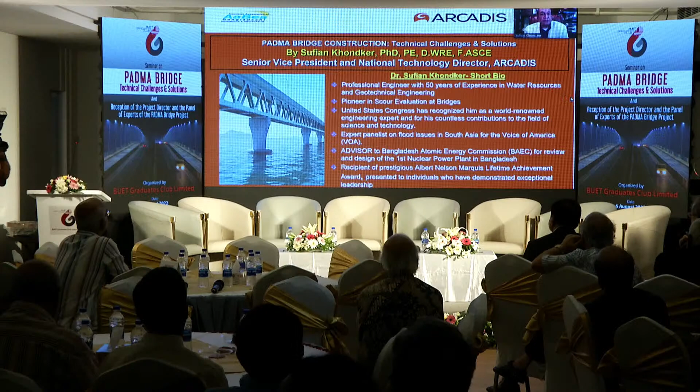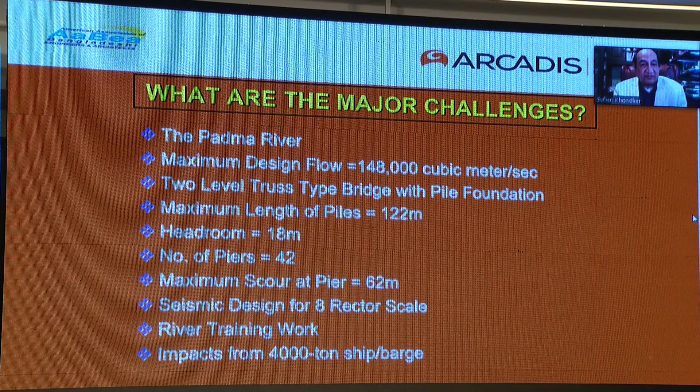What are the major challenges faced by the Padma Bridge? First and foremost, of course, the Padma River, with tremendous flow, over 150,000 cubic meters per second. The bridge itself is a two-level truss-type bridge with pile foundation, which is something unusual. We'll talk about that quite a bit. Another major challenge was the pier scour, seismic design, and of course the river training work. It was also designed for an impact of a 4,000-ton ship or barge.

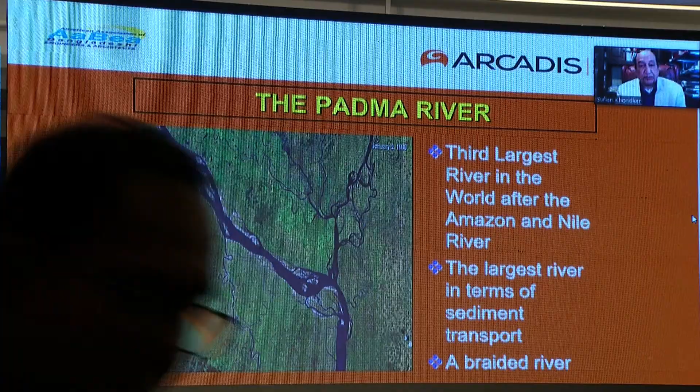To start with the river, the Padma River at the site of the bridge, as all of you know, is the third largest river in the world after the Amazon and the Nile in terms of flow. But Padma is the largest in terms of sediment transport in the world. The Padma River is defined as a braided river.

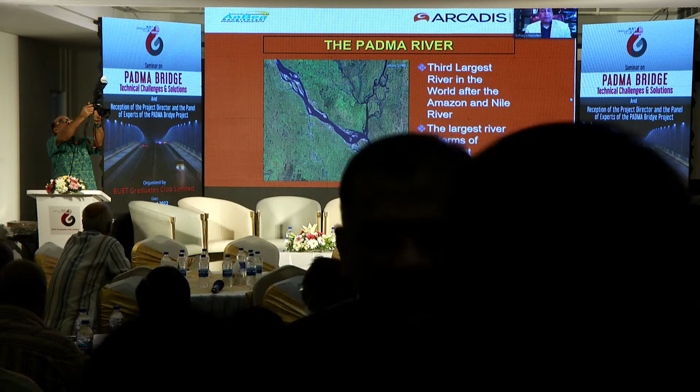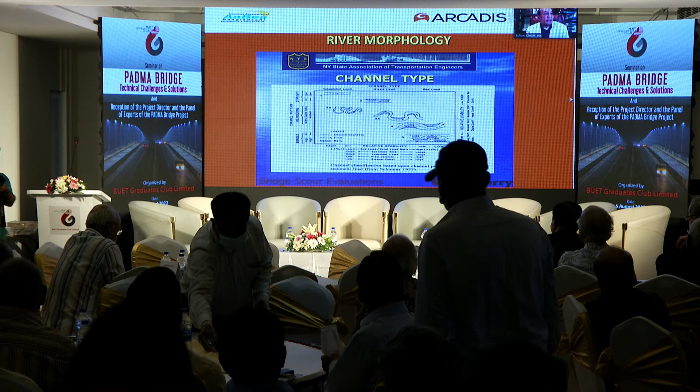What is a braided river? We river engineers grossly divide all the rivers in the world into three categories. On the left-hand side, it is shown as a straight river. These are very rare, only in the mountain region. During the inception of the river, these are narrow and kind of straight. Then when it enters the floodplain, it has a wide width.

It can wind around, which we call the meandering river. Most of the rivers in the world are meandering rivers. The third category of the river is the braided river.

The meandering river, as you can see, follows certain laws of nature. It has a well-defined bend and follows certain criteria, with amplitude as well as wavelength. We also know in a meandering river, the outer bend, the outside of the bend, always has scour, while the inside of the bend is always deposition. And also the bend moves downstream at a certain rate. Knowing all those criteria that every meandering river follows, it is much easier for a river engineer to design a river training work or bank protection work. These are predictable.

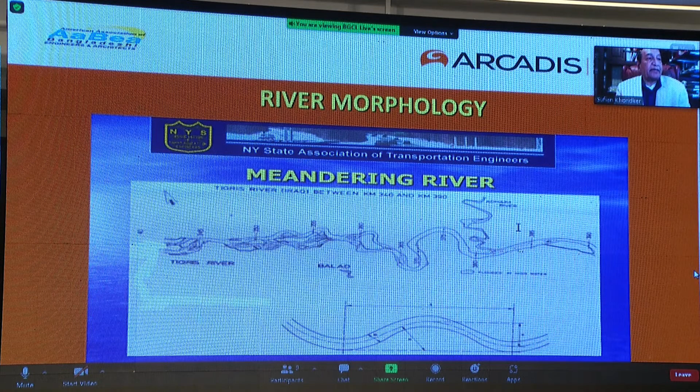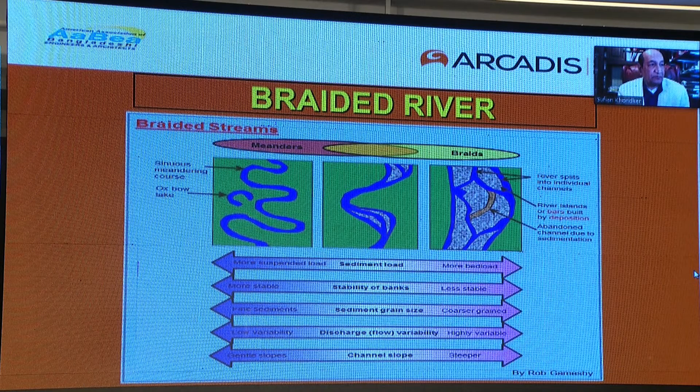The third category of the river is shown on the right-hand side. These are the braided rivers. They have no definite channel; the channel shifts from one bank to the other in a short time. In addition, the braided rivers carry a tremendous volume of sediment, and sandbars can develop anywhere.

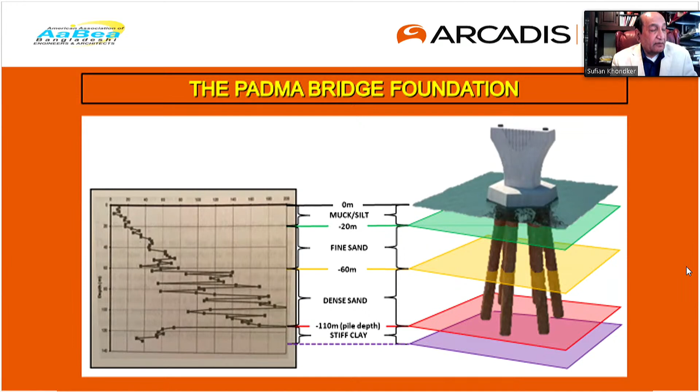This is the drawing developed by the contractor showing the 6 battered piles with a pile cap. The piles are battered because this helps take the lateral load generated from a seismic event, which is very beneficial. That's why all the piles, 1 to 6, are battered.

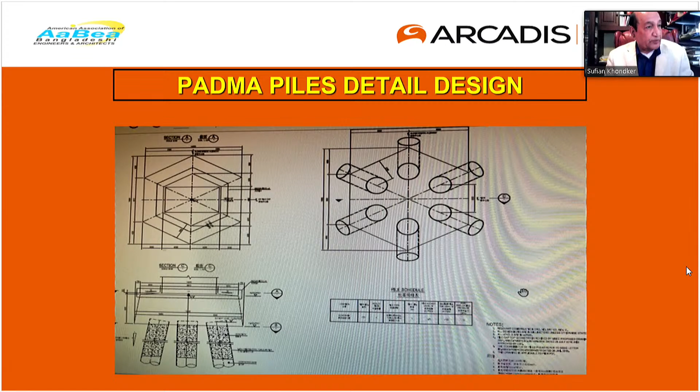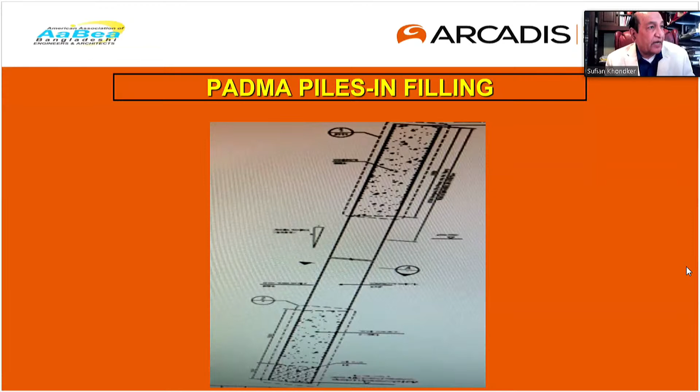The piles are tubular steel structures of very large diameter. The top 15 meters was reinforced concrete, while the majority of the length was infilled with compacted sand. At the lower end was tremie concrete and a plug so that soil cannot enter the tubular structure. That is the infilling for the piles.

This concept of tubular steel piles was first introduced in Bangladesh for the Jamuna Bridge by a great engineer, Ben Gerwick Jr., one of the greatest engineers from the United States. I was fortunate to work with him - he was a consultant for one of my most difficult projects, the submerged intake structure for the St. Lucie nuclear power plant.

As you can see, when they investigated all the piers, the soil of course varies quite a bit. On 22 piers, it was found that the soil may not have adequate capacity to carry the load coming from the piers, roughly about 10,000 tons. So...

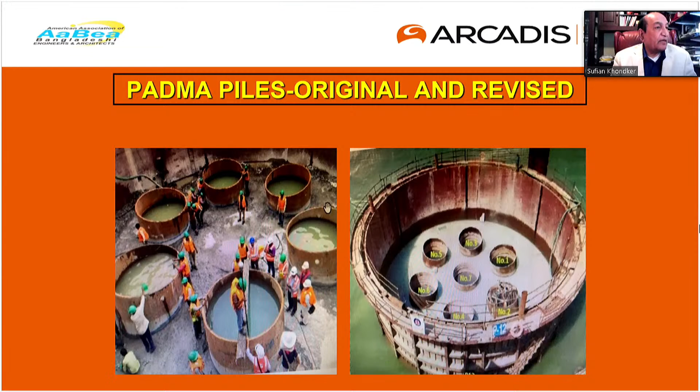So for the remaining pile structure, an innovative design was done to improve the surrounding soil by skin grouting.

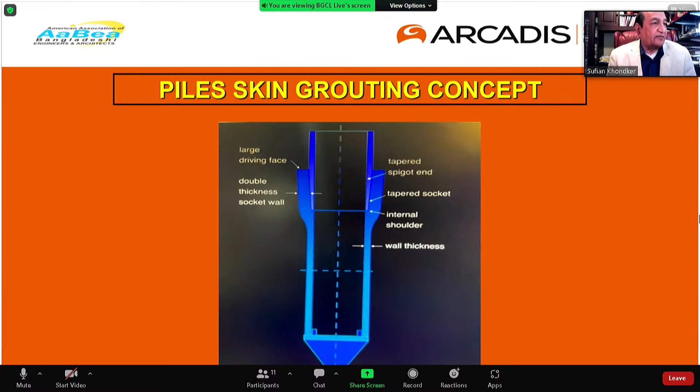But in Padma Bridge, the piles were already fabricated - those are 3-meter tubes or steel pipes, so it was a little difficult to implement this standard concept. The idea, as our respected JRC sir told us, was that channels are welded to the piles outside, and all the channels had perforations. Then grout was pumped into those annular spaces, coming out through the pores and openings to fill the pores of the sand and increase the friction.

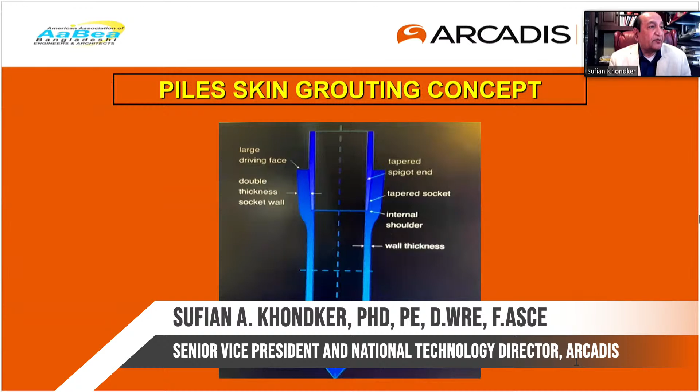But in Padma, the problem was that the sand was very fine, and obviously the pores were so small that conventional grout would not be able to enter those pore spaces. So a special fine cement was imported from Australia and used for pumping grout and introducing it into the soil to increase capacity. And that worked - two load tests were done, showing substantial improvement in the skin friction.

The driving of this kind of pile is also unheard of. This 3-meter diameter pile going a length between 98 to 122 meters is unbelievable. The two hammers used in the Jamuna bridge, with a maximum length of 80 meters, were also used. Then a specially designed hammer was fabricated in Germany by the Menck company that was used to drive the piles to the design depth. It was unheard of. This is never done anywhere in the world.

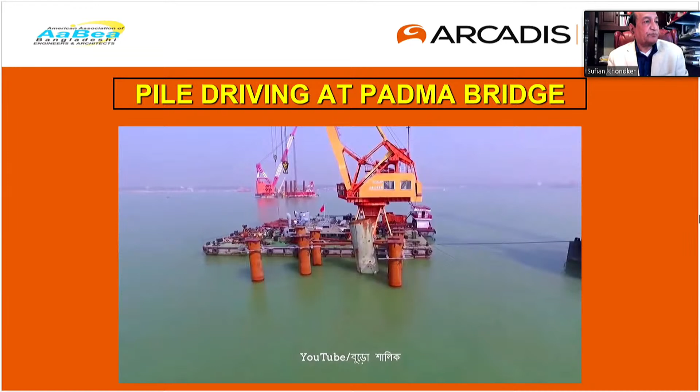Another problem was the scour. Scour evaluation was done by Northwest Hydraulics of Canada. I personally know them very well. I have used them for several model studies for my projects. I knew their principal, Vic Galay, was a very close friend of mine. And I knew that we were in good hands. They are one of the best in North America.

They did the model study and came up with computation as well as model study and came up with a potential scour of 62 meters, unheard of. I have been involved in scour evaluation in America and am one of the pioneers of scour evaluation. I never have seen or heard of this kind of scour in the world.

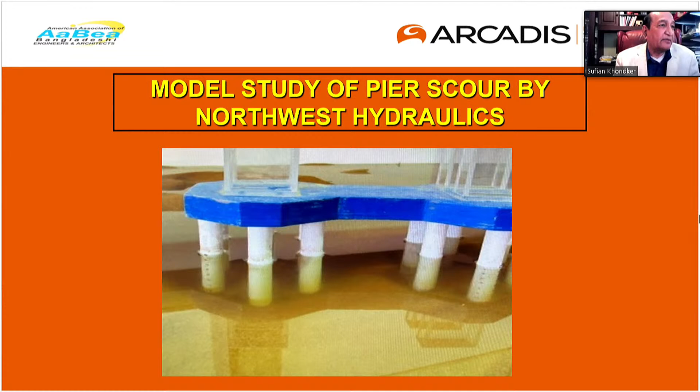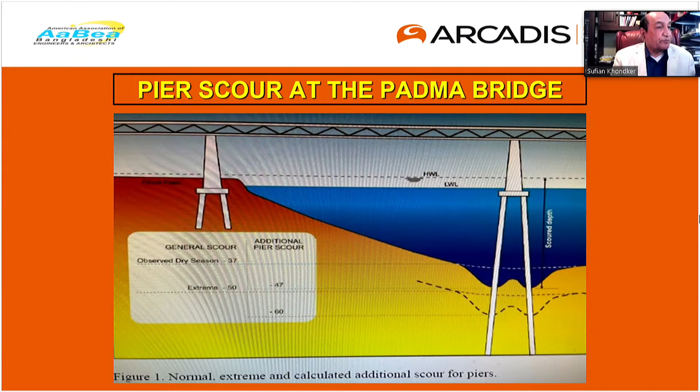Again, as I said, I am involved in scour evaluation in the United States, and I give lectures to bridge engineers and highway engineers on how to evaluate scour at bridges.

Prior to 1980, there was no organized methodology—you will be surprised—even in the United States, for how to determine scour. But in a short span of 3 months, 3 major bridges failed: Schoharie Creek, Hatchie River, and Ariel. The Schoharie Creek failure really created a tremendous political impact. It is in New York. Due to that failure, 10 people were killed. So the government took up a crash program.

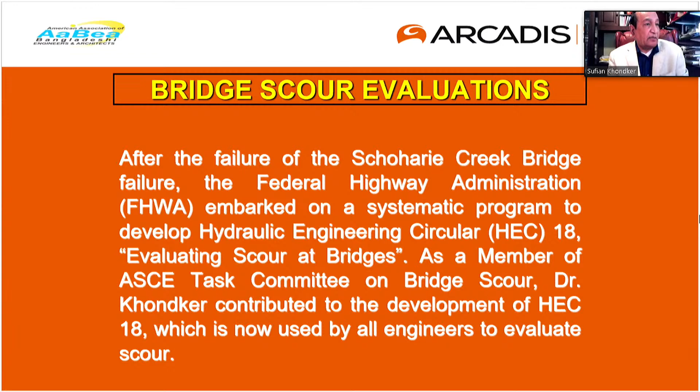Over 500,000 bridges were evaluated by 2000, and 5% of those bridges are considered to be scour critical, needing some protection, which has been implemented. And we hope that in the future there will be less failure of bridges in America.

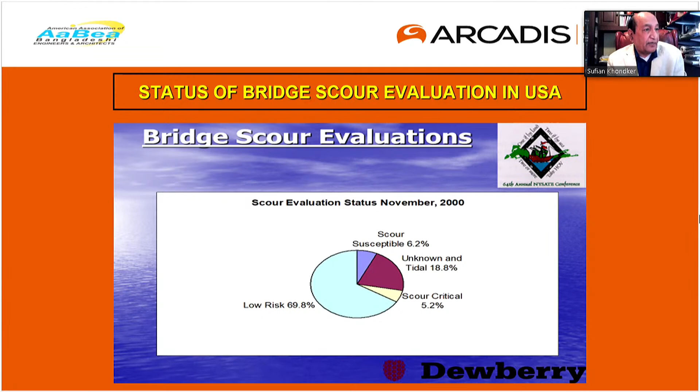So how does scour take place? In a flowing river like the Padma, where the peak velocity could be as high as 4 to 4.5 meters per second, when you put an obstruction to the flow, the flow gets separated and creates a vortex at the bottom. Because of its shape, we call it a horseshoe vortex. That lifts up the soil from the bottom, and the ambient current carries that sand away and creates a big hole around the pier.

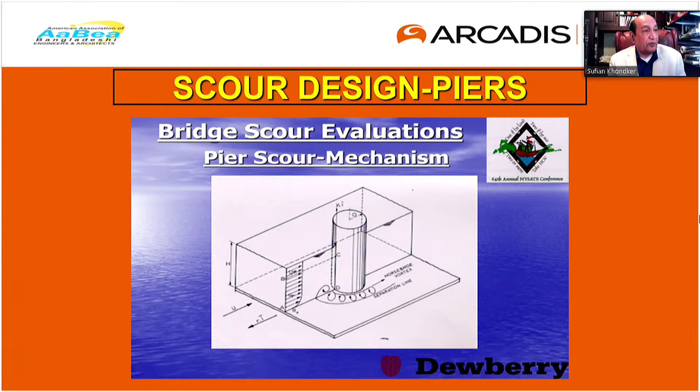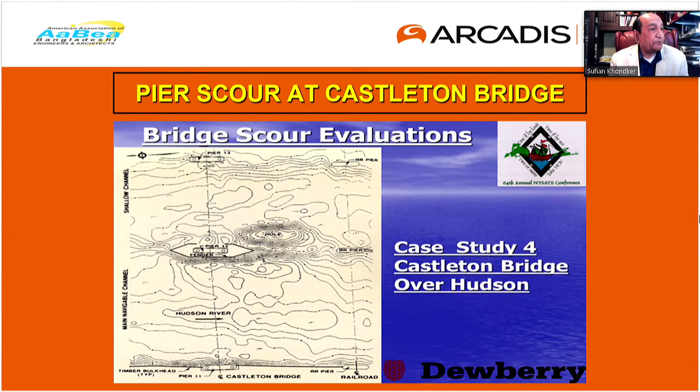This is a project in New York State called Castleton Bridge. It's a large bridge over the Hudson River. As you can see on the left-hand side, there is a pier showing those big scours. As you can see, the scour could be pretty big, even in a relatively milder river.

So the Padma is a very difficult river, very high velocity. So the computed scour was a total of 62 meters.

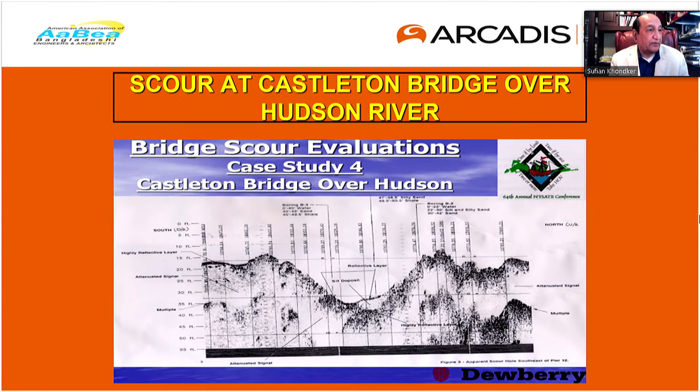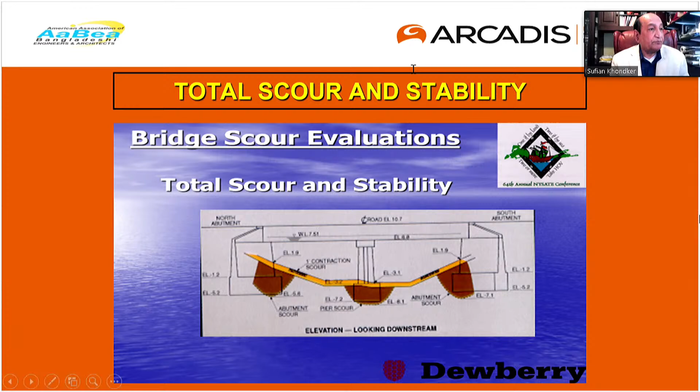One of the things I did not see, and this is my question to the expert panels, is that I haven't seen anywhere that for the pier scour, any countermeasures was proposed or being considered right now. This is the standard practice. We designed...

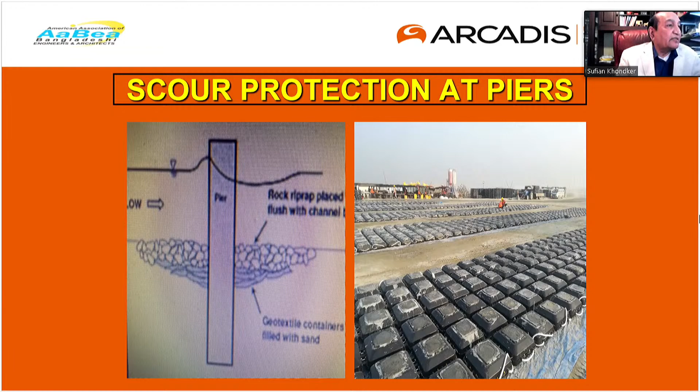Now, one of the things I heard from one of my good friends from Kuwait was a concern that this pier scour may interfere with the migration of the Ilish fish. Of course, Padma Ilish is world famous. We cannot impede the migration of the fish.

So let me try to share one project I looked into. I had the opportunity to visit Wuhan, China. In Wuhan, I had the opportunity to visit the largest hydroelectric power plant, and they have a specific problem of fish migration.

They had introduced fish ladders, fish elevators, but one of the most famous fish is the sturgeon, so that could not migrate. They had to artificially create a hatchery and introduce this fish on the downstream side of the dam. So if there is a problem, we can address that. I have to move fast.

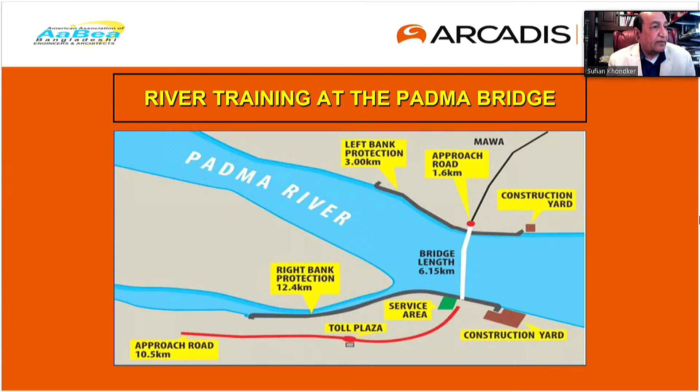The river was excavated up to elevation minus 28 meters, which was the capacity of the dredges, and those are filled in 3 layers of geo bags. On top of the geo bags, they put the armor layer.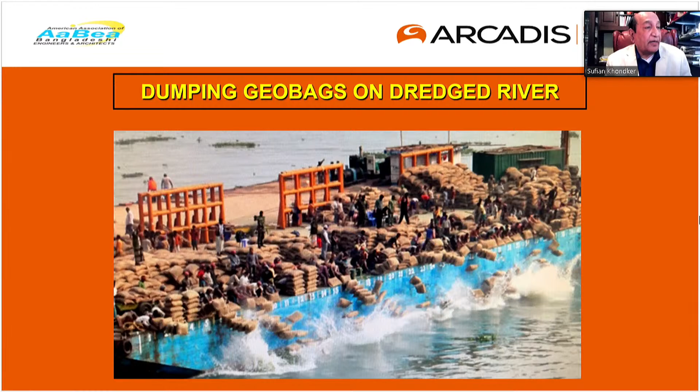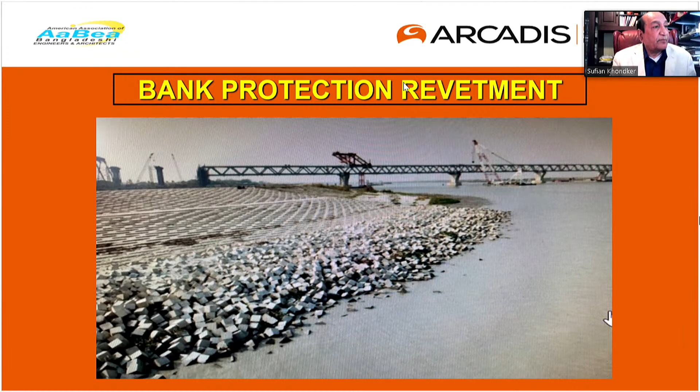These are the concrete blocks, I think each weighs about 165 kg, were put on top of those bags in layers and act as armoring. This is the finished product. It was done by Sinohydro, one of the largest projects, over $1 billion cost.

It is expensive, but again, nobody has handled the Padma River before.

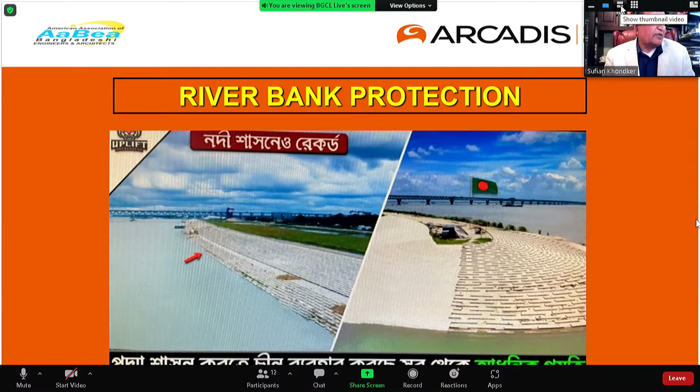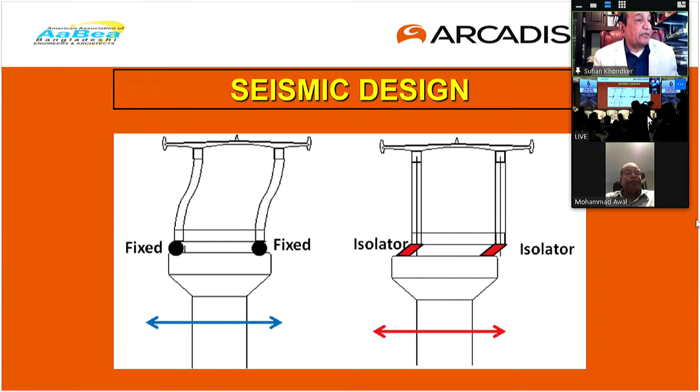Friction pendulum bearings were used. These are monsters, very big. Never ever were such big bearings fabricated in the world. It was done in Wuhan, fabricated.

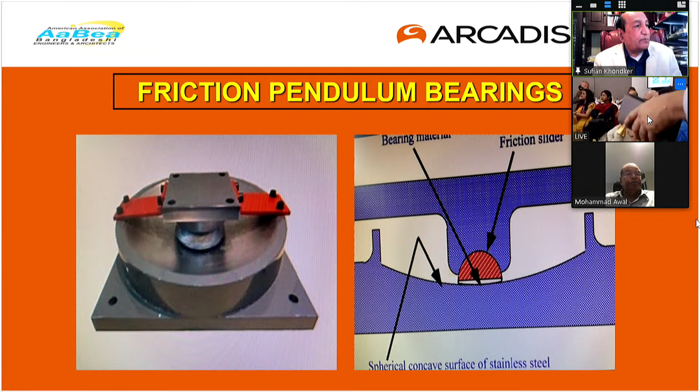These are very big structures, as you can see in the actual picture. I think it weighs about 15 tons each, the largest one, and it can carry or transfer a load of about 10,000 tons.

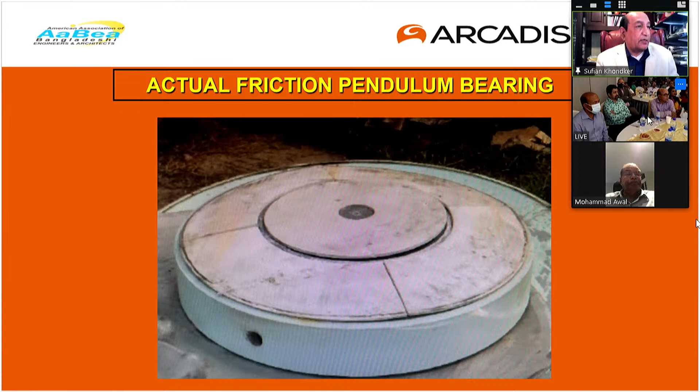The last thing was that the piers are designed for the impact from a 4,000 ton vessel, be it a barge or ship. This shows a ferry that hit pier number 17. Of course, nothing happened to the pier, though a lot of people were injured in the ferry. So this bridge has been extensively designed and has solved so many challenges.

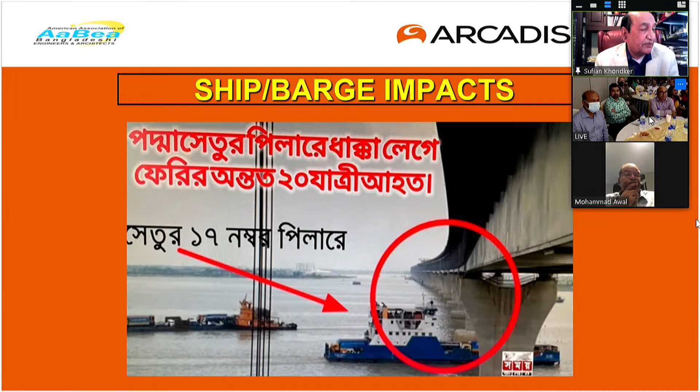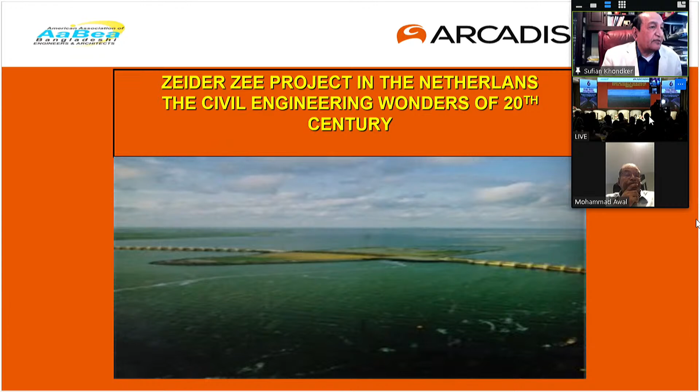This is one of the projects done in the Netherlands called the Zuiderzee project, considered one of the wonders of the 20th century. ASCE, the American Society of Civil Engineers, identified major projects as the engineering achievements of the 20th century, and this is one of them.

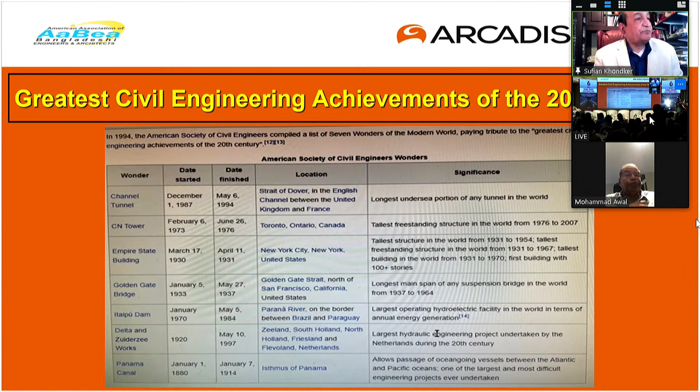I think Padma Bridge qualifies to be recognized as an engineering marvel of this century, the 21st century. Why? The bridge is over the most difficult river in the world. The double-decker bridge with truss system is a unique and rare design. The pile foundation is...